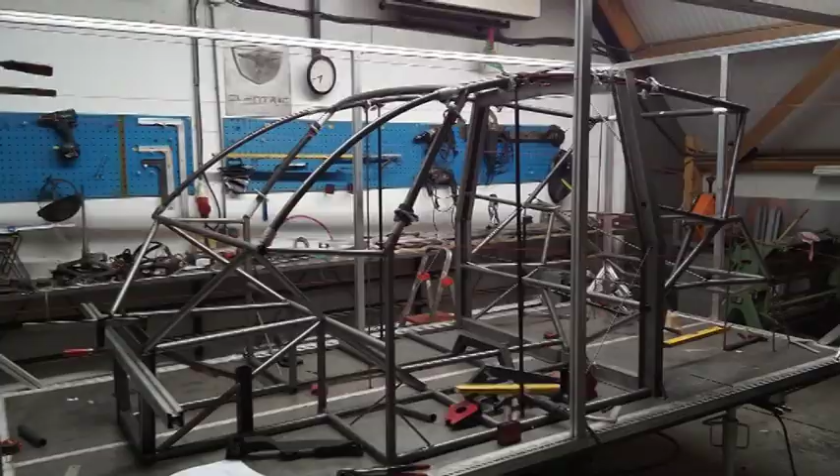Today we're going to talk about a little bit of a redesign, and that's basically because I had some thought about what I'm doing and where I want to go. And yeah, basically the last few months I have been thinking of ways to make it better, cheaper, etc.

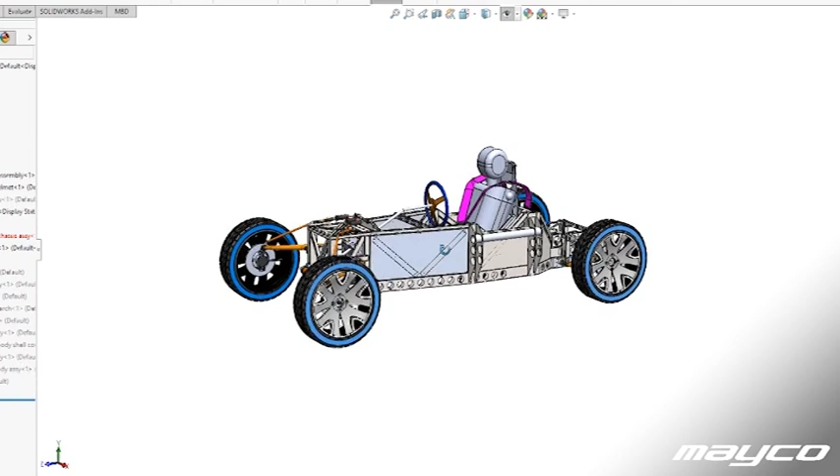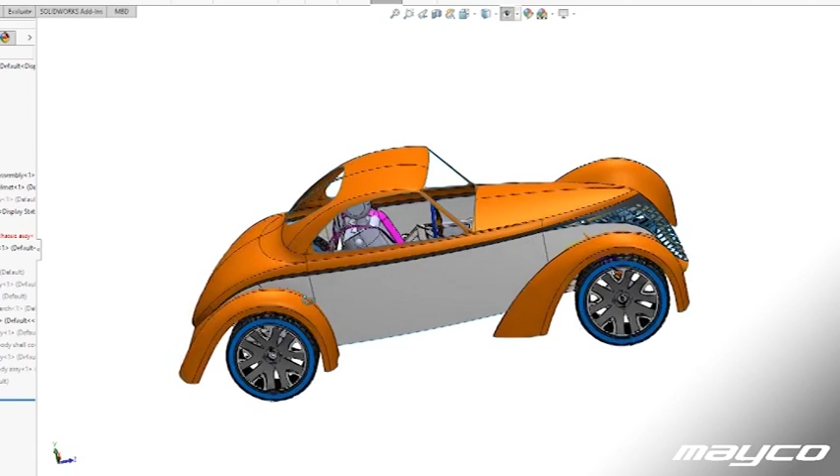And this was also helped by the fact that I visited the old company I worked for, building race cars, and got new information on the seating position, which allowed me to have the person sit lower in the car. And therefore make the car lower, therefore using smaller and cheaper tires, etc. So it's a snowball effect, and this basically also has to do with the body that I want to design for this car, and also the regulations.

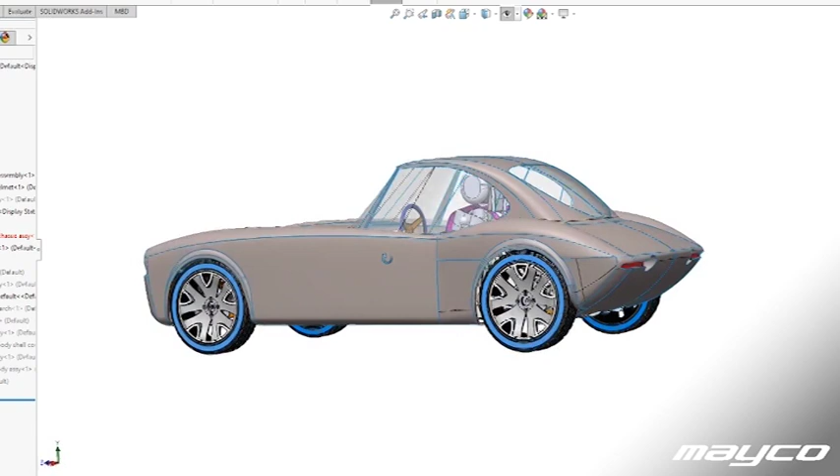Within the regulations, the width is not an issue, the height is not an issue, but the length is an issue. And if I go with bigger wheels, the car will automatically become a little bit longer due to the seating position. If I go for smaller wheels and the seating position is lower, then I can also make the car a little bit shorter, which allows me to stay most likely within the regulation. So that's basically a little bit of background information on that.

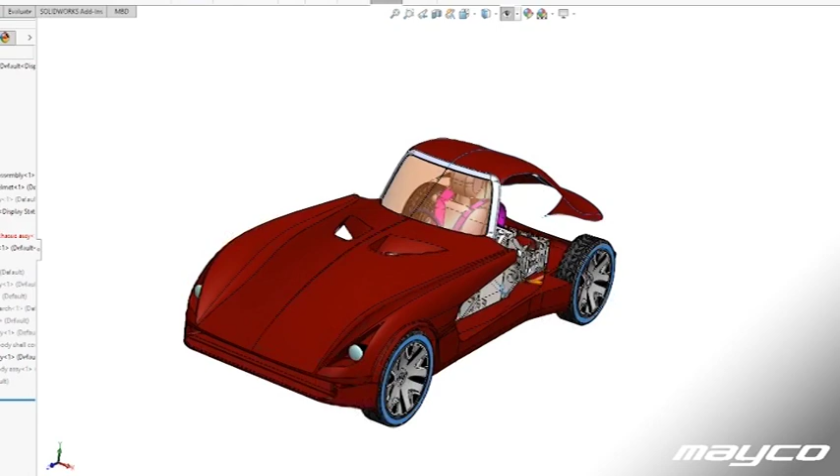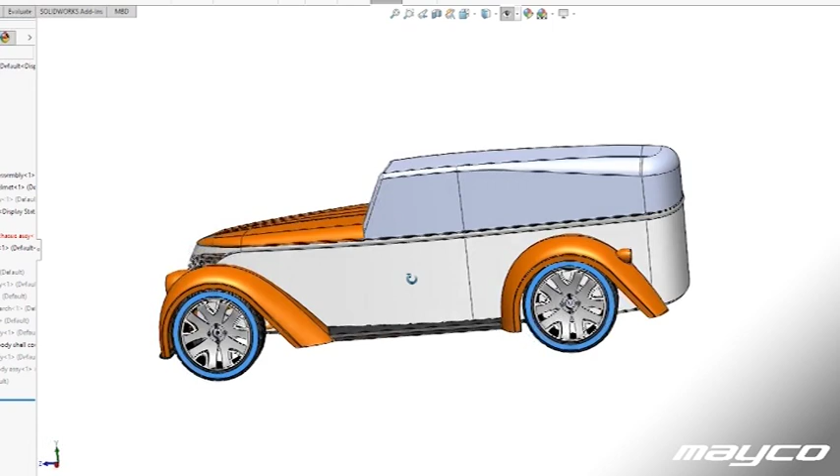What does it mean? Well, as I mentioned, the seating position is different, much lower, therefore the car can be lower, therefore I can use smaller wheels. Cheaper wheels, cheaper rims, and of course build lighter. By building lighter and by building lower, I can also build more aerodynamically. My center of gravity will be better, and therefore my battery pack can be smaller, which means cheaper but also lighter, because the lighter the battery pack is, the less weight I have to pull with me, and therefore my weight is reduced, my range is increased.

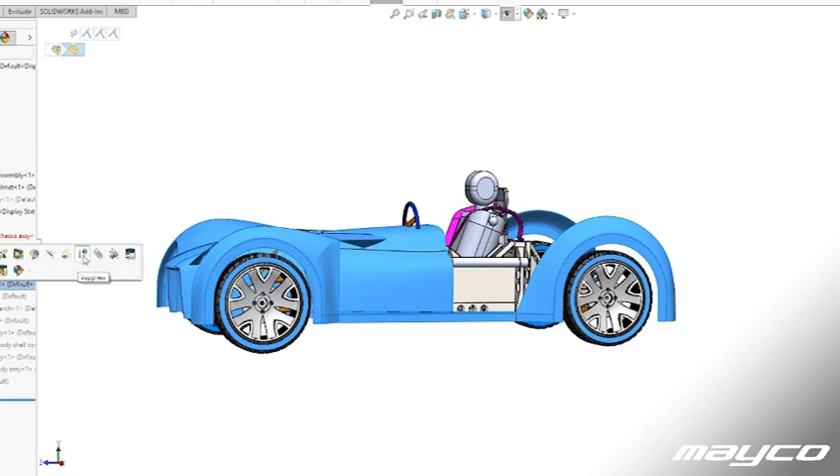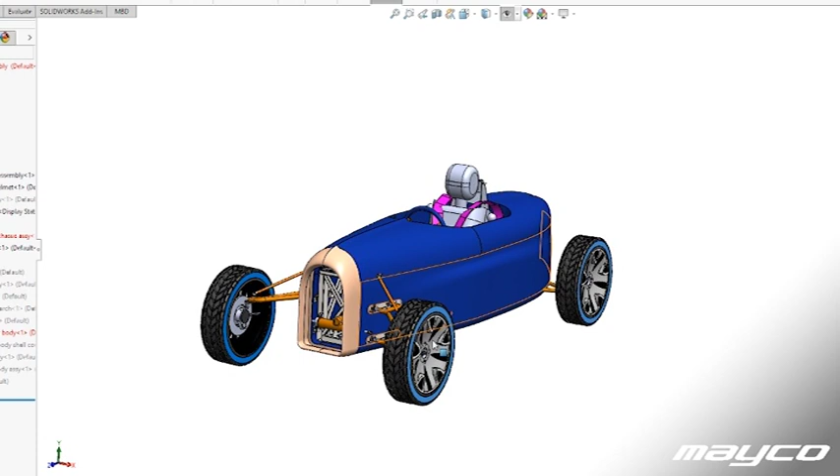And what I find important with this car, of course, is the budget. But second of all, I have solar panels on my house. So if I have, for example, a 40 kilowatt hour battery pack, then I cannot charge that with my solar panels. However, I have an electric motorcycle right now, and it's like 1.2 kilowatt hours battery capacity, and I can charge that fine. Now with this car I'm aiming for about 7, because I want to keep the weight extremely low, below 450 kilograms, possibly even around the 350 kilogram mark.

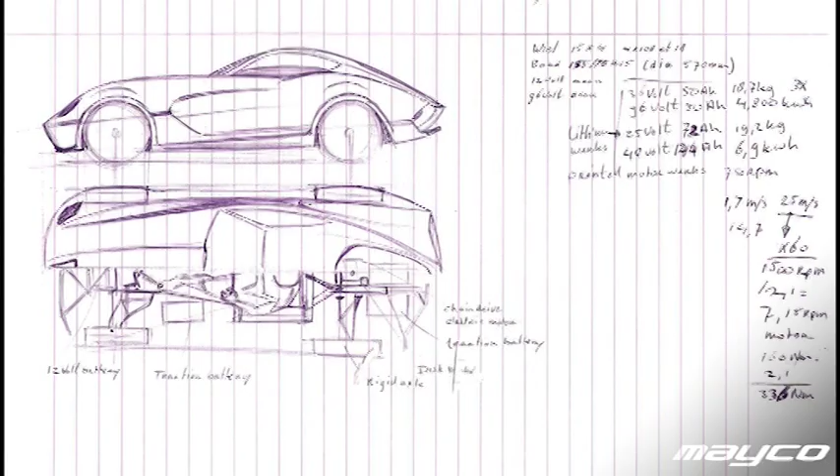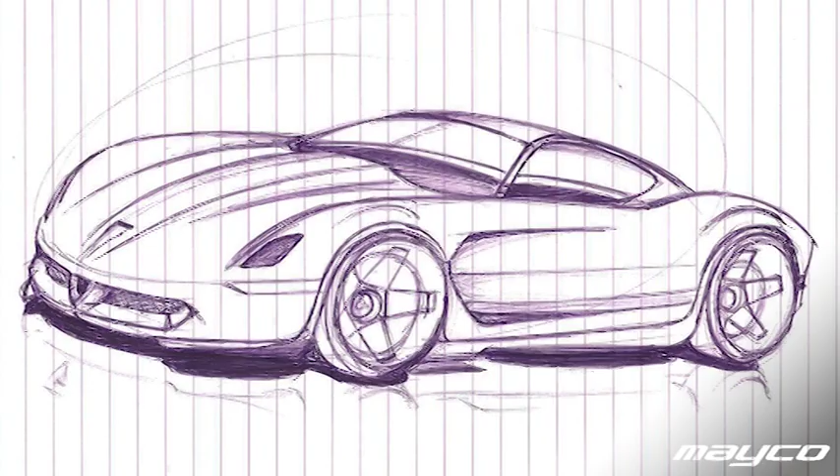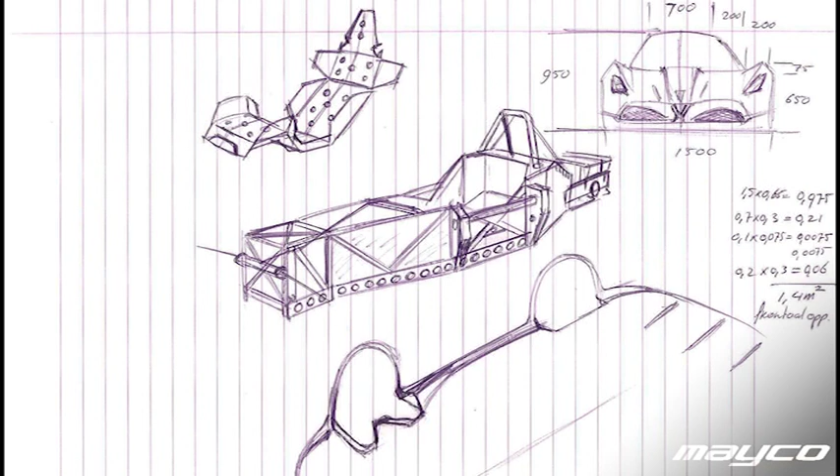So I don't need a range of 200 kilometers, because it's 15 kilometers to my work and 15 kilometers back. So that's the basic. I need to be able to reach that. And with my electric motorcycle, you can find that the cold weather and the wind really does a number on the range. So as I mentioned, in the summertime I can do 50, 60 kilometers on a battery pack, and on the same battery pack with cold weather and windy weather I can only do 30 kilometers. So that's basically the starting point of the redesign.

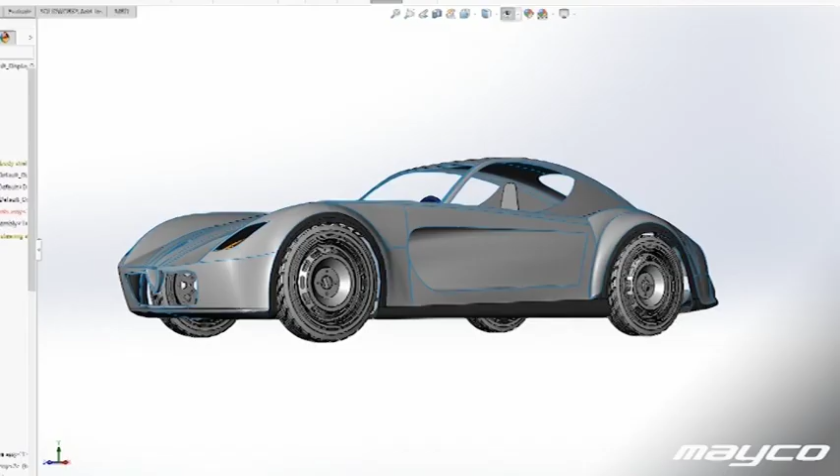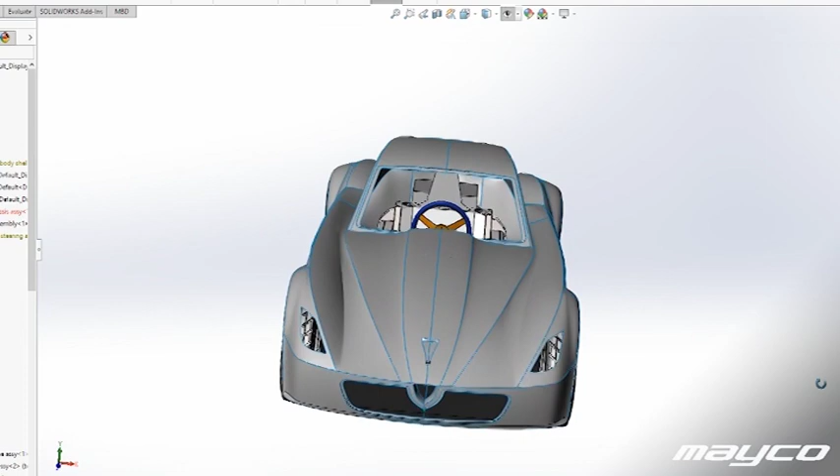So a couple months back my daughter was born. I have a son and a daughter, and when my daughter was born I had a lot of inspiration, and I started sketching a car for this chassis. And basically I didn't do anything with it for, let's say, 8 months. Then we had a little break, and I started to design again with the car. I will show you the design phases that I went through

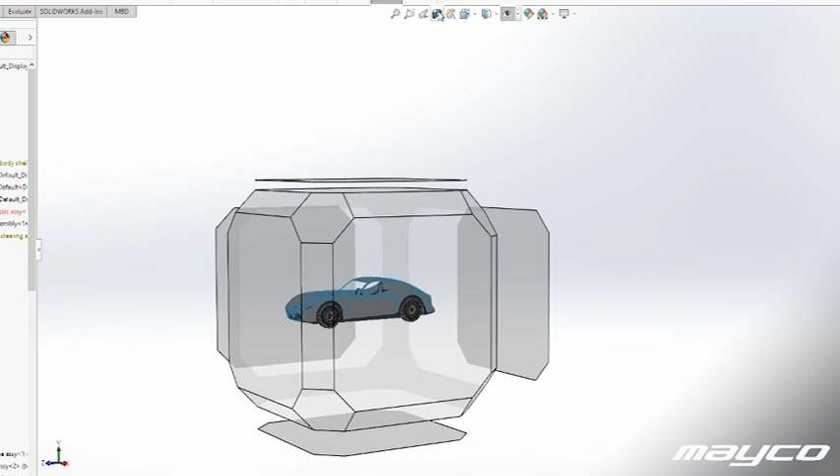in this video. So in those 8 months, I did make a model of the car. However, those files got corrupted. So I again designed the body of the new one, which I can of course show you. I find that when you design a car, you need to have several iterations of the body shell anyhow, so I don't really care for it.

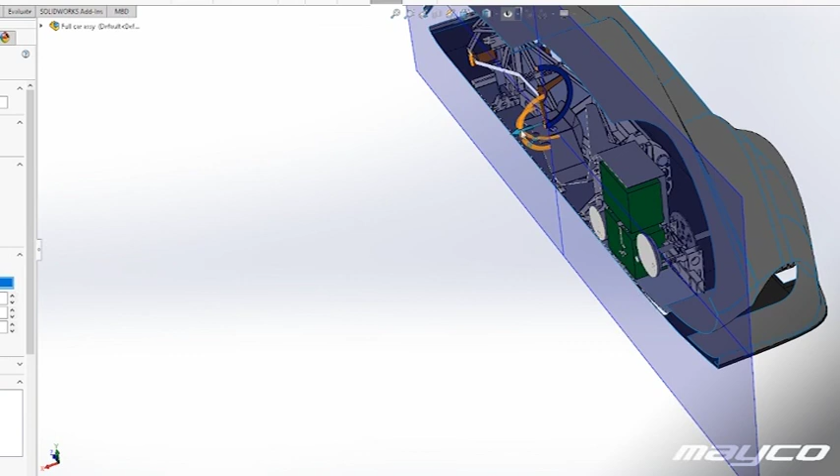I can show you the end result, and then we can work towards the final version, I think, in some video after this. But what I want to talk to you about is first of all the design. I mentioned a little bit that I worked on reducing the weight, reducing the height, and increasing the efficiency basically.

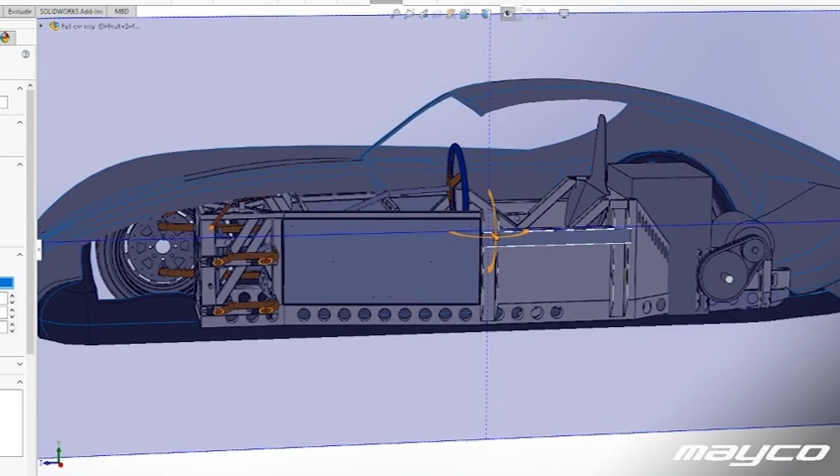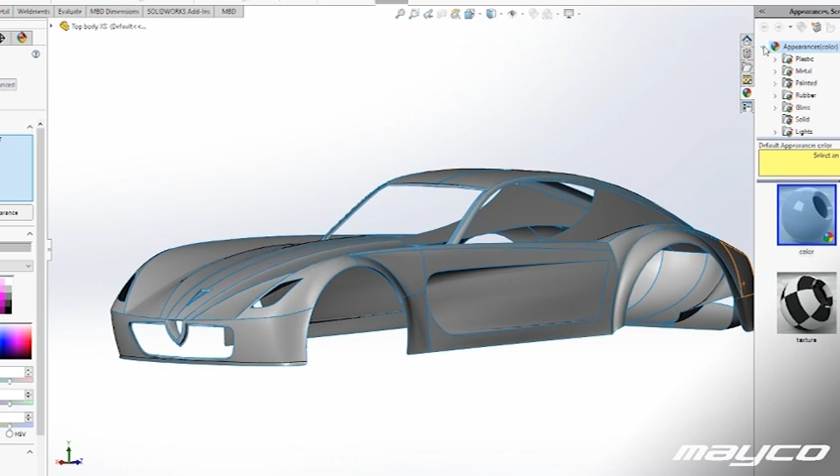I also wanted to have a design that I want to make this package work for. Now again, this is a skateboard design, so many different body styles will fit the car. Like I showed in my previous skateboard design videos, I have a hot rod body for it and some other body styles for it as well. But I wanted to have a body to start the whole project on.

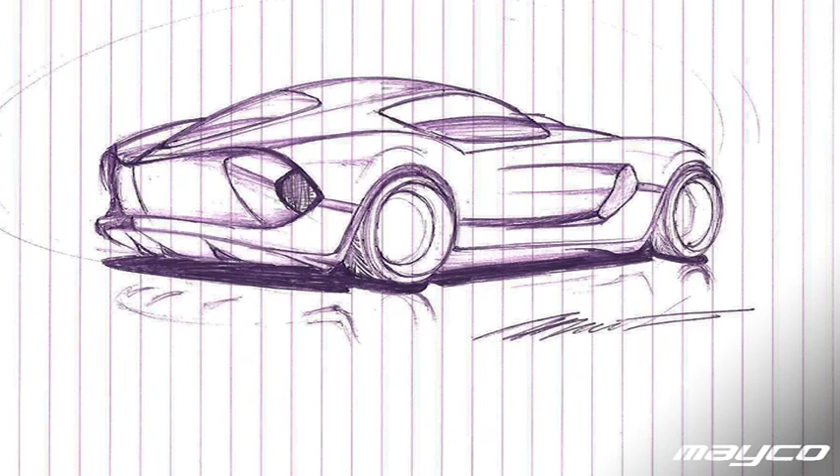And I'm a guy that likes classic cars, so what you'll see is it has quite some classic lines in it. You can see a little bit of a Jaguar E-Type, a little bit of a Viper, a little bit of a Marcos, some cars like that, Corvette maybe, and some details of those cars you can find in it, but it's its own design.

And anyway, for those people who want to know how small this car actually is, because if you hear me saying the number 350, 450 kilograms, you might think, wow, what are all the other companies doing wrong? Well, I believe that in order to use the full potential of electric, you need to go as efficient as possible and as lightweight as possible, and that also means smaller, especially for this commuter type vehicle.

So the car will be around 1 meter high. If you have a normal car, it's between 1 meter 30 and 1 meter 40, 1 meter 50 high. So that's 1/3 lower already. Then the width is 1.5 meter, that's set by regulation. And normal cars these days are 1.8 meters wide. So it's a foot or 30 centimeters narrower than a normal car.

And then lengthwise, it can be around 3.4 meters long, I believe, based on the regulations. And yeah, a normal car is easily 4.5 meters in Europe. So again, there it's much smaller, and therefore we can build it lighter. However, it's also going to be much more simplistic. So there will be a simple heater, but there will be no air conditioning. Because air conditioning just takes up easily 1/3 of your battery capacity if you run it on a car, especially with such small capacity.

So it will be a very basic car that has drive, has a heater function, and has a steering wheel and a body shell on top of it. Basically, very simply put, that's what it is. But you don't need a lot more because you're only driving, let's say, 15 minutes to work. So the only thing that you care for generally is that you're sitting dry. I want to have cruise control in it just because it's more efficient, and I want to have a radio in it because that's the only thing I miss when I'm on my motorcycle. But that's basically it. So that's also why I'm able to build it very light.

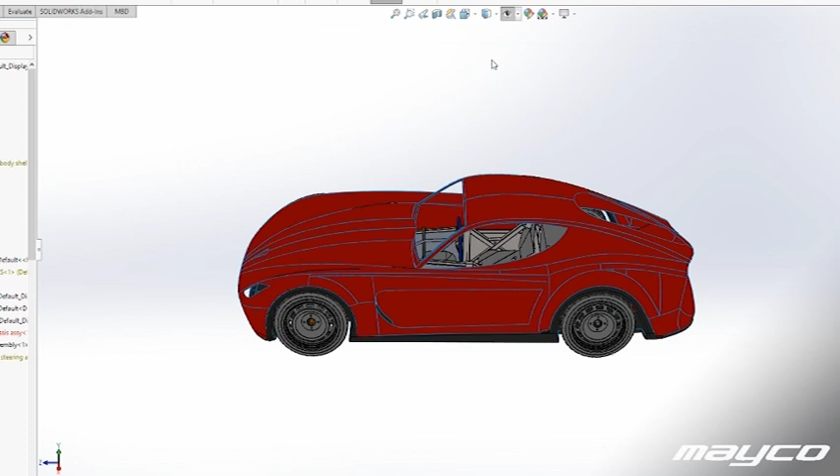So that's basically the background on what type of car it is, and that's something you really need to understand. You can do groceries with it just fine. That's not an issue. However, you don't expect it to be able to drive on a holiday or something like that. So just for reference. Looking at the car, I think it looks very nice, very unique, because it's a single-seater car. It's a very small car, but it's quite wide. We can do a lot with shapes, and we can make it look quite aggressive. And of course, that is not always the best for aerodynamics. I realize that, but I just want to drive a cool car that's quite efficient, that brings me to work dry, and is very affordable.

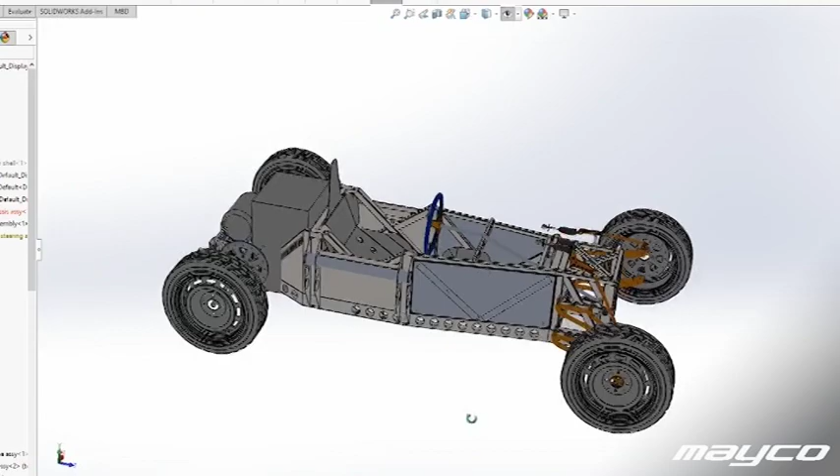And I need to be able to charge it with solar panels that I already have, or maybe I can put some additional ones on, and that's basically the drive for this. And again, if I want to put a hot rod body on, I can. If I want to put a convertible body or whatever on, I can. So that's the beauty of this whole project. Looking through the design that I'm showing here, this is what I'm trying to accomplish, and I'm hoping to get all the parts in to get it affordable.

Now, talking about pricing, I don't know what the end result will cost. I don't care about that for now, but one of the main struggles that you have with doing this is that, as an example, if I wanted to go for cheap brakes, I can go for a little bit older style car, and I can get the hubs of that and get the disc brakes on that and the calipers.

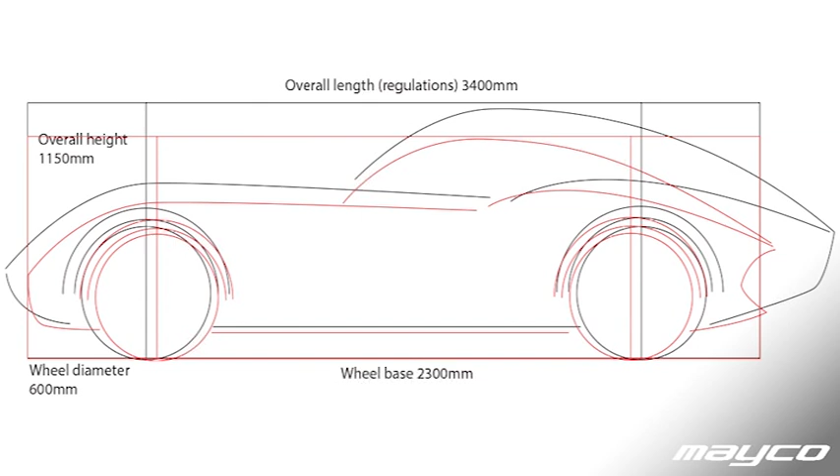Now, if I do that for all four corners, we are most likely talking about at least 20 kilograms for the hub, the brake caliper and the brake disc. If I want to go for a little bit more sophisticated brakes, for example, in the past on the project I spoke to Wilwood for lighter brakes, they can save me a lot of weight.

However, let's say I save 1/3 of the weight, maybe even 50% of the weight. The costs will also be 3 times more expensive, if not more. So that's the struggle with building lightweight and cheap. You have to balance out weight versus costs all the time with everything.

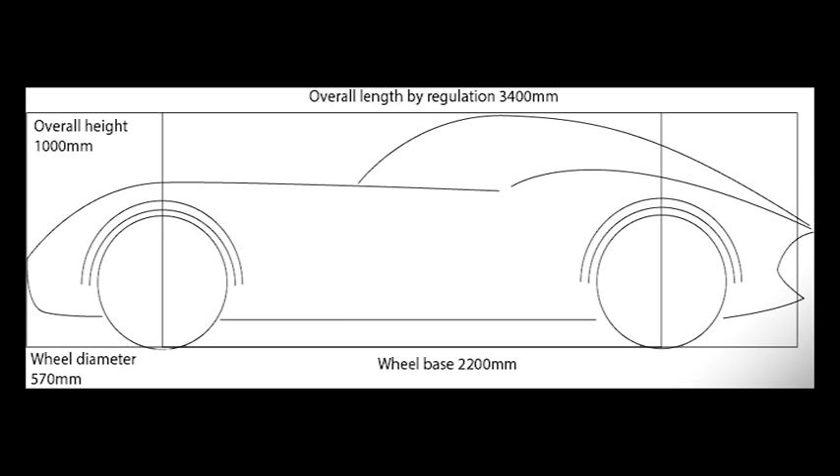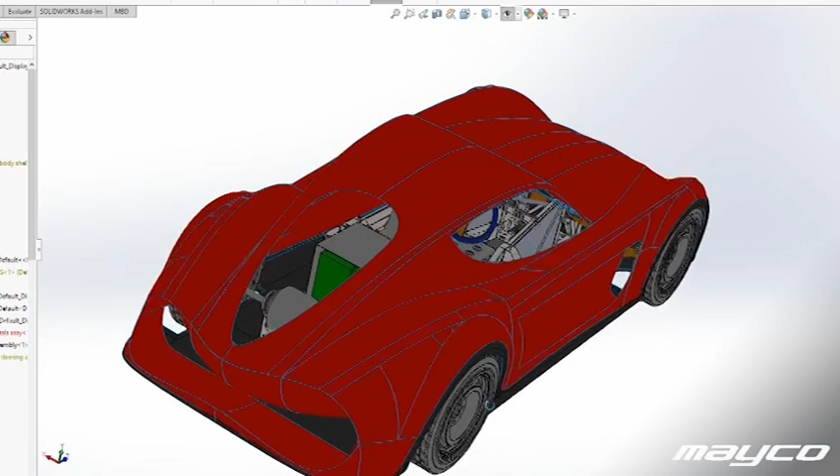I mean, I could make the body out of carbon fiber. Hell, I can even make the chassis out of carbon fiber. But then we're talking about a $50,000 car, or maybe even a $100,000 car, and I want to keep it somewhere in the range of a 10 to 15,000 euro car. And therefore I need to go with stock brakes from some car. That's just the thing that is happening right now.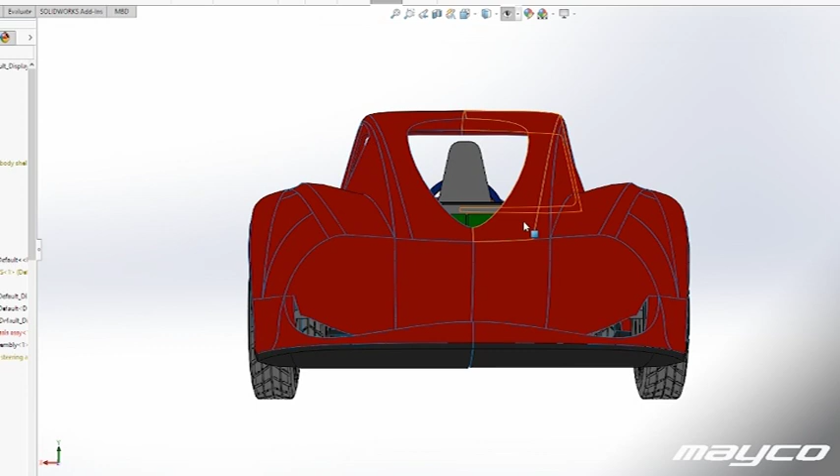So same with the rear axle. I wanted to go for independent suspension because it gives you a little bit more freedom with the wheel arch design, etc. However, if I just put, like a go-kart, an axle through with a single disc brake in the center and have a sprocket and a chain driven by an electric motor, then everything is so much simpler and so much lighter, and I save a disc brake.

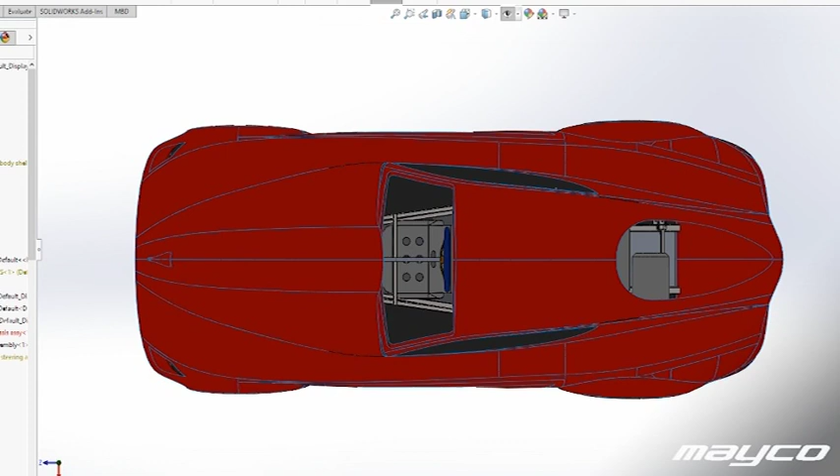And I want to be able to drift this, because that's a dream of mine, having an electric drift car. So having a rigid axle is something you want to have for that anyway.

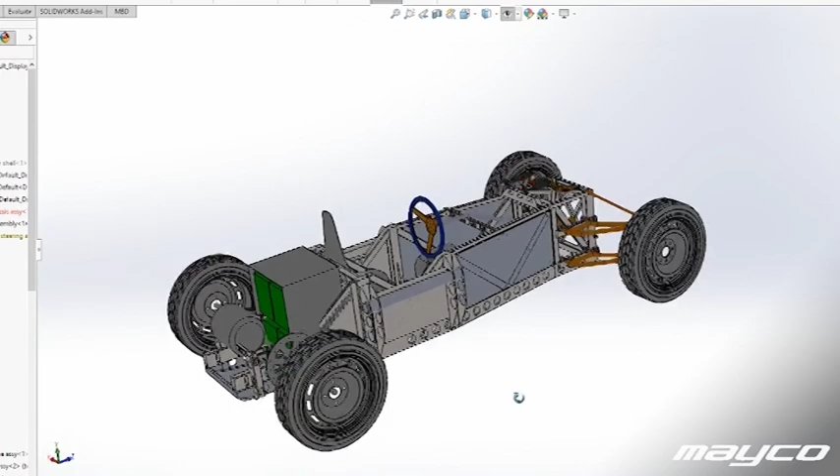So it's these decisions that make building a car like this extremely difficult, because it's very easy to start running in circles. If I do this, then I cannot do that. But if I do that, I cannot do that. So in the end, you need to start making decisions, which is extremely difficult. And most of the time, these are also extremely personal.

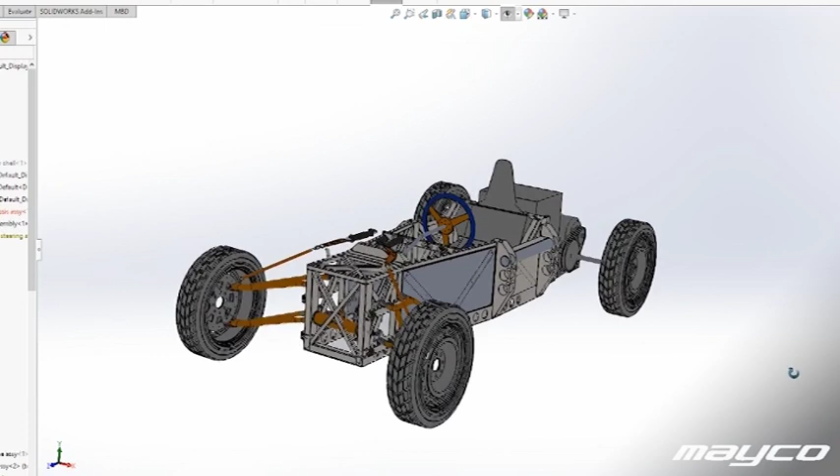So I hope these examples give you a little bit of an insight into what I'm trying to do, how I'm trying to solve these things and how I'm trying to package the car. What I've decided is I take the front disc brakes from a small old car to have a little bit of weight in the front, because otherwise I'm afraid that I have too much weight towards the rear.

For the rear, I'm going for a single rigid axle with a single disc brake with dual calipers, one for the hydro e-brake, one for the regular brake, and then a sprocket with a chain and an electric motor. The person driving is basically sitting in the center of the vehicle with the battery pack underneath his back. All that keeps the center of gravity very low, because it's a very low car and quite big wheels.

The wheels are 15-inch wheels from a Smart. These have 135/70 R15 tires, which give me a diameter of around 570 millimeters. So on a meter high car, it's a very big tire. And it's a 15-inch rim, just a steel rim, first of all because it's affordable. It's a tire with a little bit of meat on it, and since the body style is quite classic, I don't mind having a smaller rim with more meat on the tire. I think it looks fine.

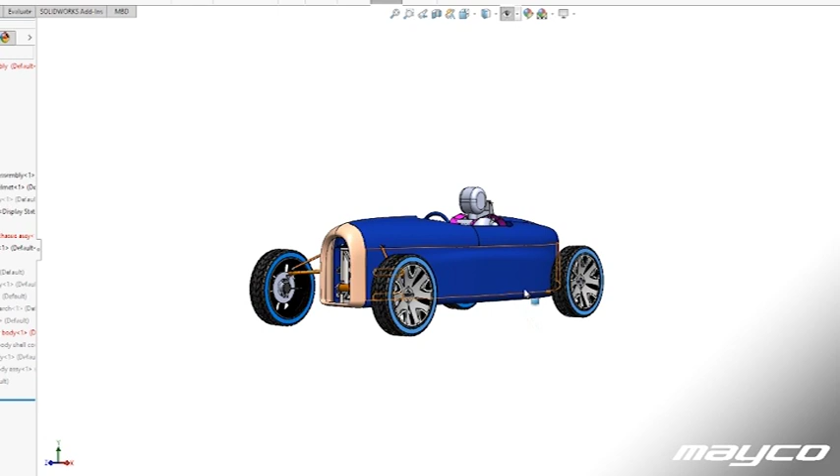So again, a lot of decisions, a lot of things to consider, but I think doing it this way, we can keep it cheap, or cheap-ish, and we can just start building it. Same with the wiring, just go for simple parts, simple wiring, not a lot of options, make it easy, make it something you can build on your own. I think that's the way forward.

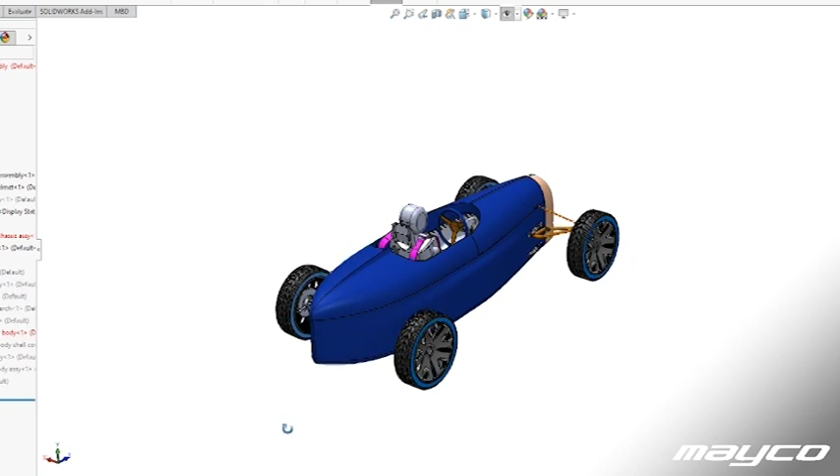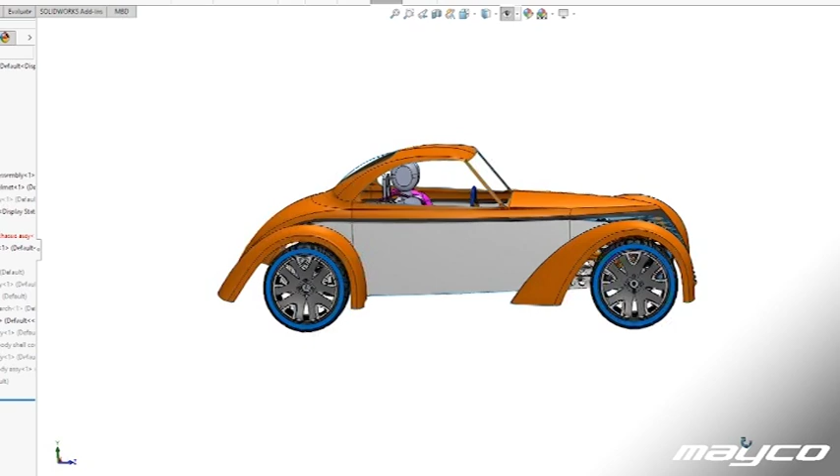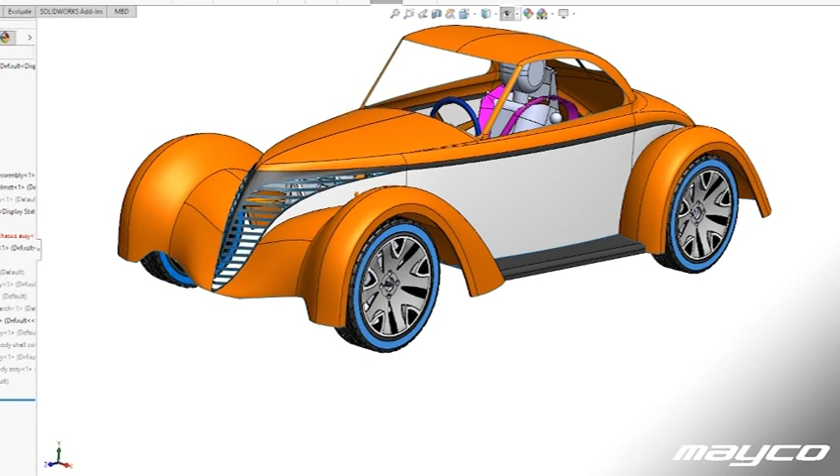So again, I'm trying to get the weight around the 350-400 kilogram mark, a range of ideally 60 kilometers per charge, and around a 7 kilowatt hour battery pack, something I can charge with my own solar panels. That's the gist of how this redesign came together with the new seating position. I hope you like the direction we are going, and more detailed design and engineering videos will follow shortly, because of some of the changes I need to make to the chassis.